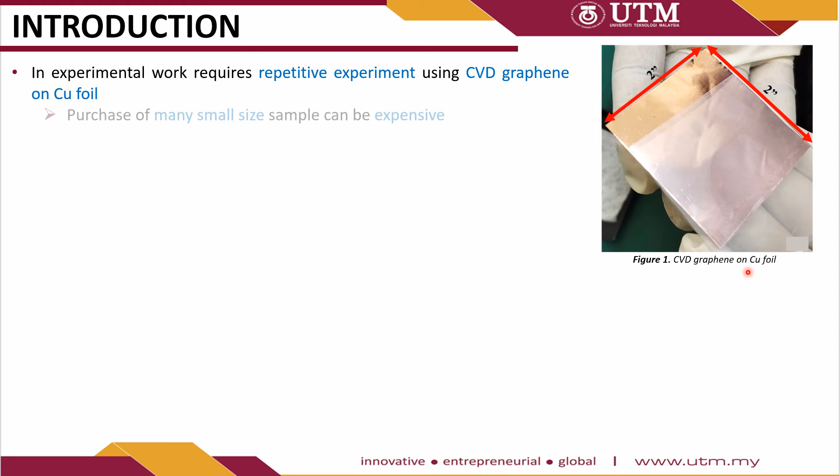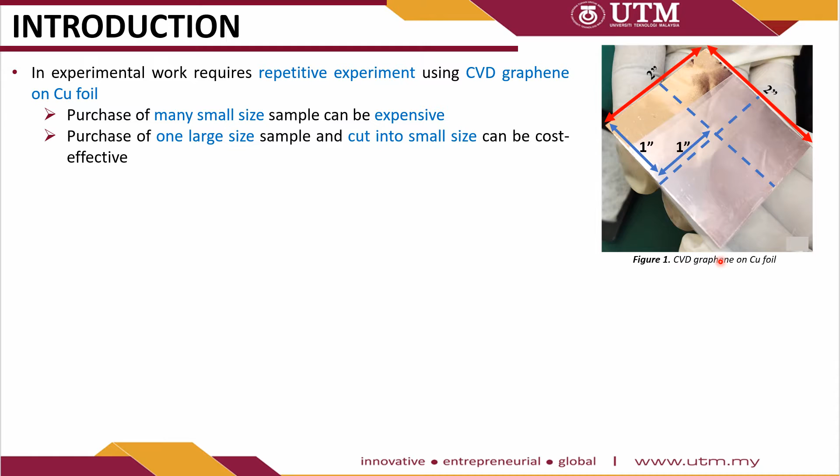Experimental work requires repetitive experiments using CVD graphene on copper foil. Purchase of many small size samples can be expensive. This can be overcome by purchasing one large size sample and cutting it into small sizes. It can be cost effective. The cost below shows a major difference in terms of the price.

One piece of 2 x 2 inch graphene costs around $215 and it can be cut into 4 small pieces with size 1 x 1 inch. When the cost was divided, one piece of cut CVD graphene on copper foil only costs $53.75. This is way cheaper compared to buying 4 pieces of 1 x 1 inch CVD graphene on copper foil separately.

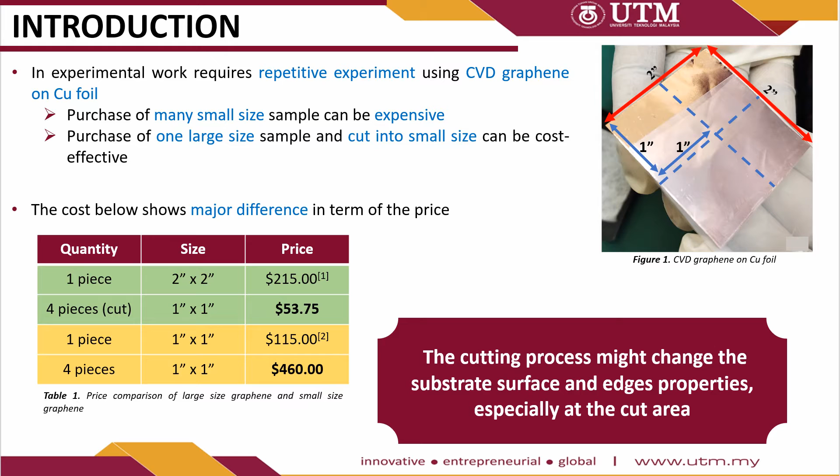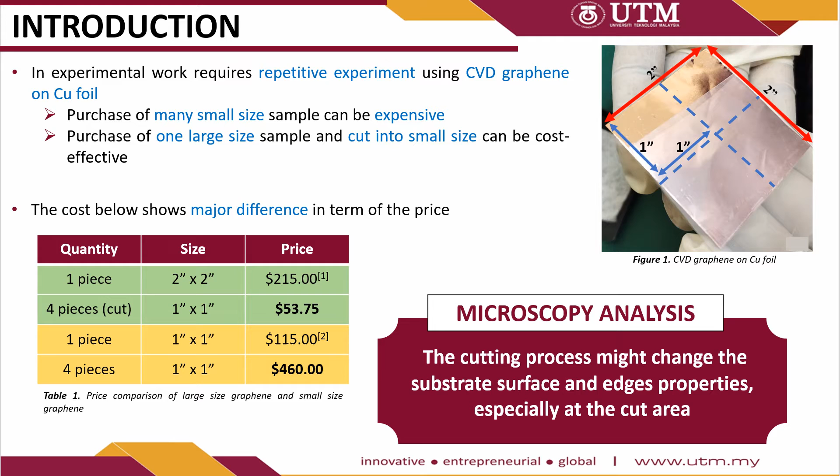However, it is important to note that the cutting process might change the substrate surface and edge properties, especially at the cut area. Therefore, microscopy analysis is important for surface evaluation on copper foil substrate grown with single-layer graphene prior to further experimental work.

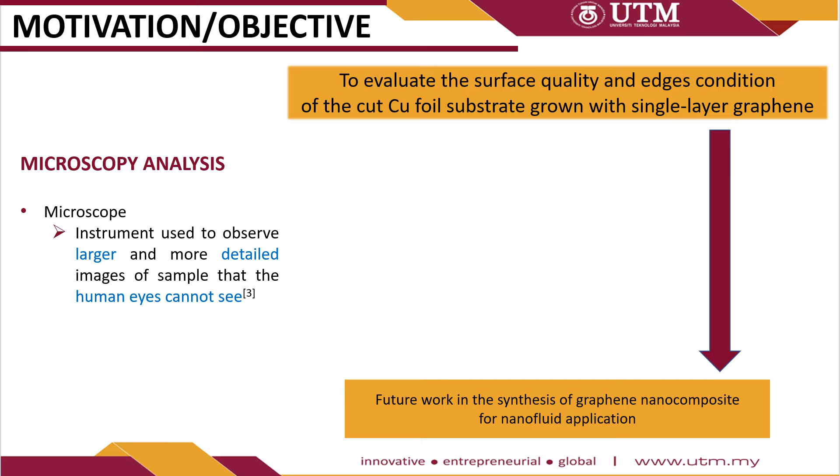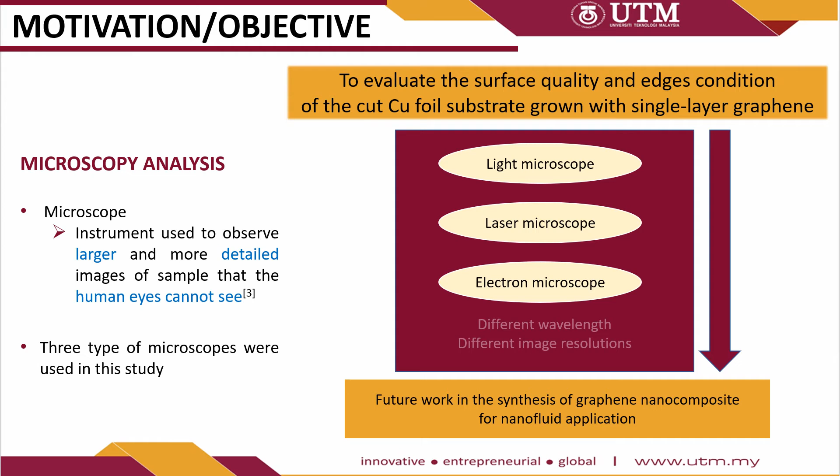A microscope is an instrument used to observe larger and more detailed images of samples that the human eyes cannot see. Microscopy analysis is important in this study to evaluate the surface quality and edge condition of the cut copper foil substrate prior to future work in the synthesis of graphene nanocomposite for nanofluid application. 3 types of microscope were used in this study, that is light microscope, laser microscope, and electron microscope. This is because each type of microscope has different wavelength and different image resolution.

For experimental work, copper foil substrate grown with single-layer graphene in original size of 2 x 2 inch was cut into small size samples by using a pair of high-quality stainless steel scissors. Fine-tip stainless steel tweezers were used as a handling tool. For microscopy analysis, observation was performed on the same cut substrate in the following order, that is, optical microscope and digital microscope, 3D laser scanning microscope, and field emission scanning electron microscope. Each type of microscope has different illumination sources.

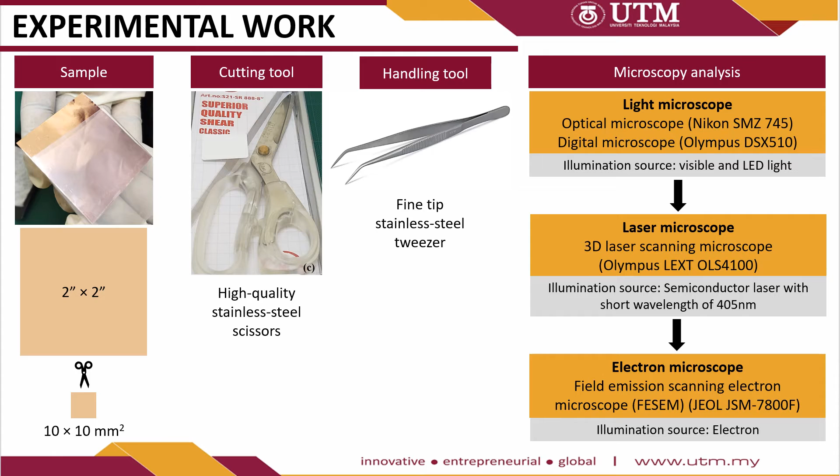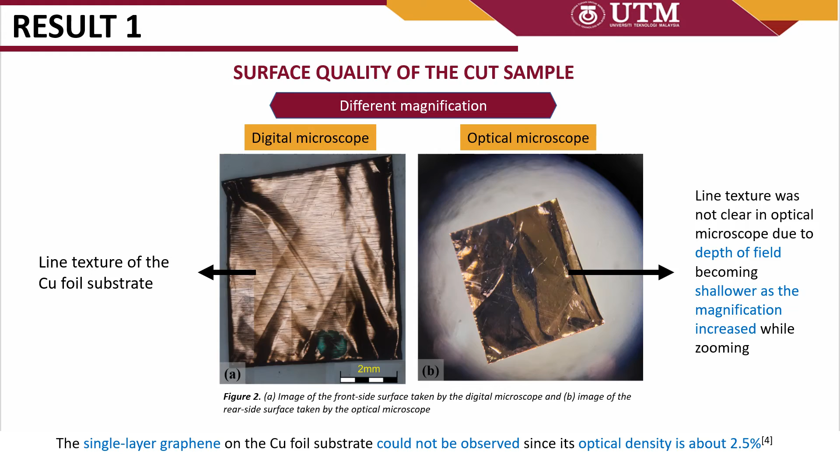Other than that, line texture was not clear in optical microscope due to depth of field becoming shallower as the magnification increased while zooming. Additionally, the single-layer graphene on copper foil substrate could not be observed since its optical density is about 2.5%. FESEM was then performed at high magnification on both sides of the copper foil substrate, which then confirmed the line texture of the copper foil substrate.

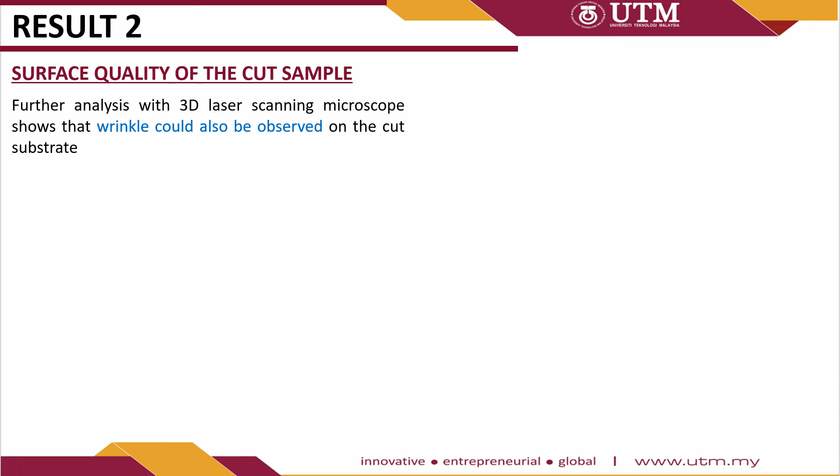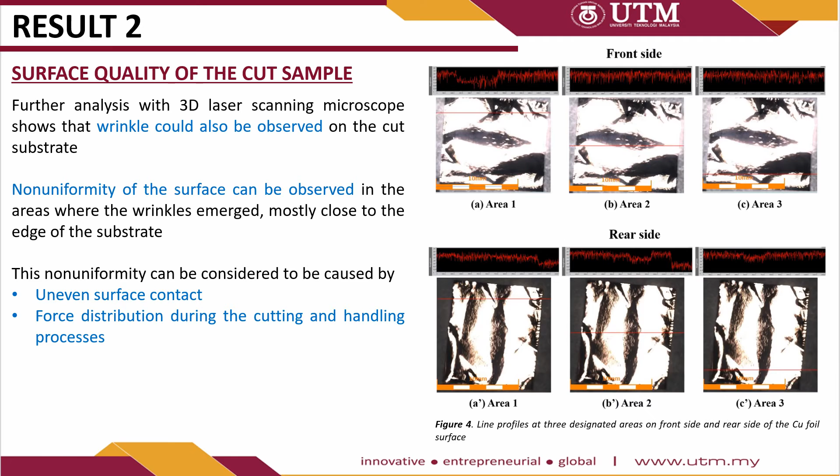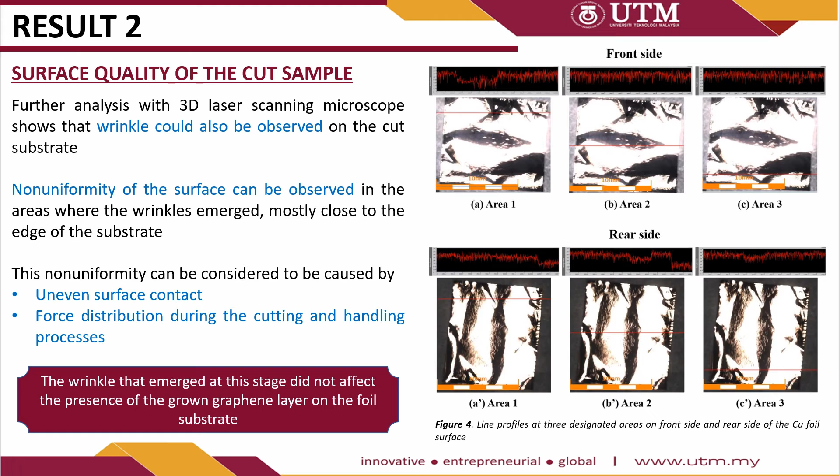Further analysis with 3D laser scanning microscope shows that wrinkles could also be observed on the cut substrate as shown in figure 4. Non-uniformity of the surface can be observed in the areas where the wrinkles emerge, mostly close to the edge of the substrate. This non-uniformity can be considered to be caused by uneven surface contact and force distribution during the cutting and handling processes by using scissors and tweezers respectively. However, the wrinkle that emerged at this stage did not affect the presence of the grown graphene layer on the foil substrate. Next result is the edge condition of the cut sample.

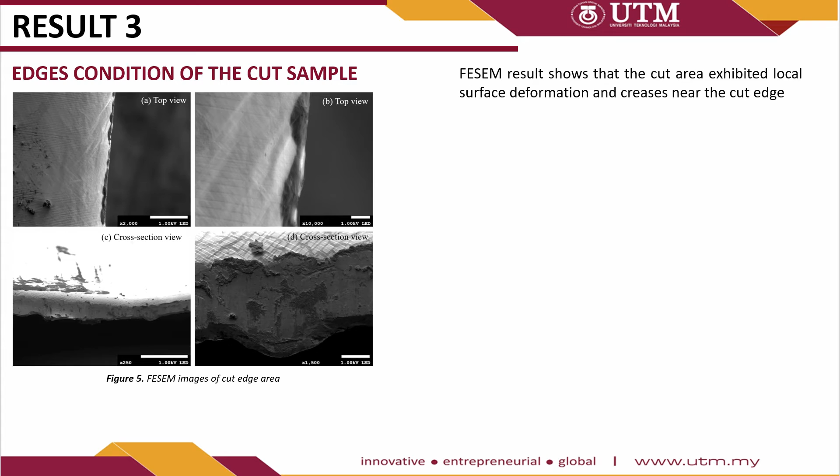Figure 5 is the FESEM images of the cut edge area. FESEM result shows that the cut area exhibited local surface deformation and creases near the cut edge, which then caused the edge roughness on the cutting surface. The cutting process involves friction between the scissors and the copper foil substrate. This friction developed edge roughness during the cutting process, attributed to the existence of cutting force.

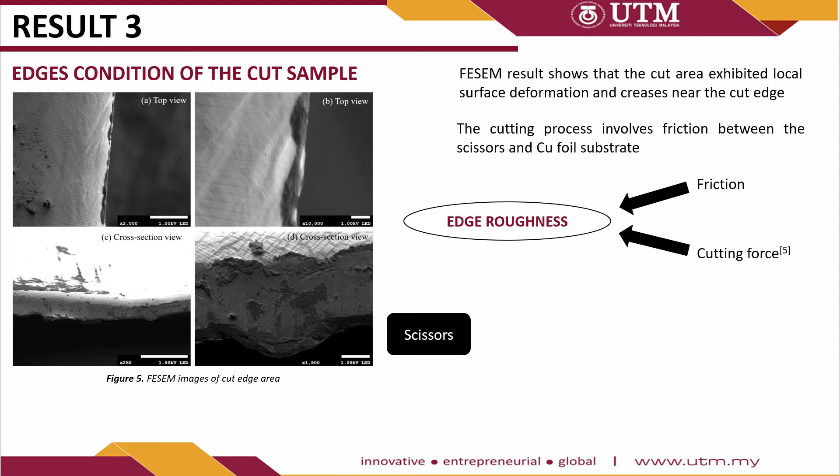Although cutting the substrate using a pair of scissors produces edge roughness, this method is still recommended compared with cutting the substrate using a diamond cutter or knife. This is because this method can prevent damage to the graphene layer as it avoids direct contact with the substrate surface. The roughness, however, can be reduced by controlling the speed and the angle of the cutting forces.

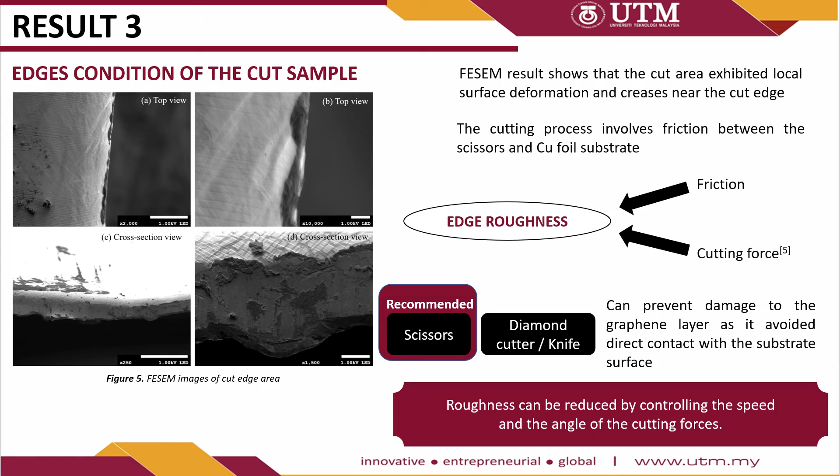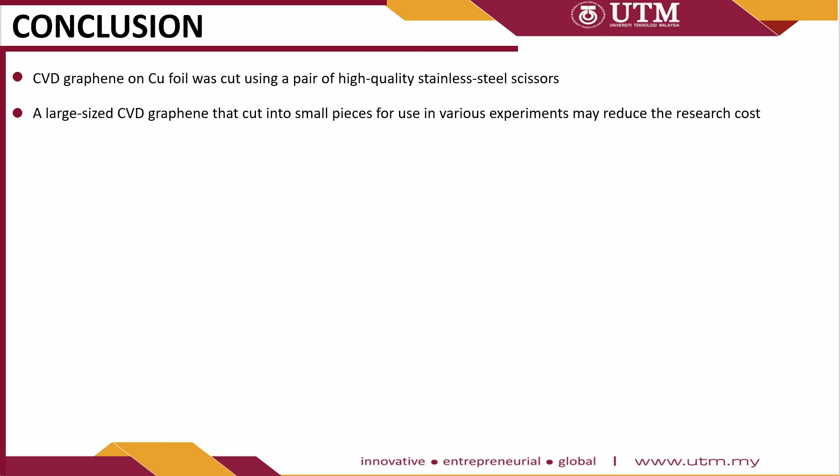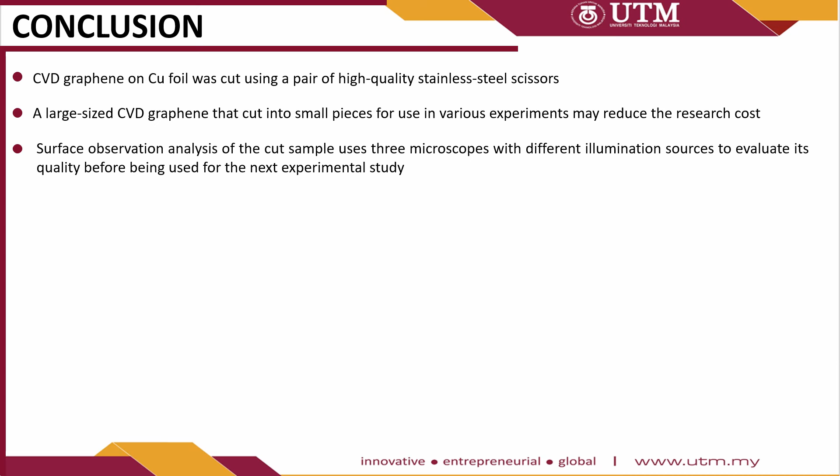As a conclusion, in this study, CVD graphene on copper foil was cut using a pair of high-quality stainless steel scissors. A large-size CVD graphene cut into small pieces for use in various experiments may reduce the research costs. Surface observation analysis of the cut sample uses 3 microscopes with different illumination sources to evaluate its quality before being used for the next experimental study.

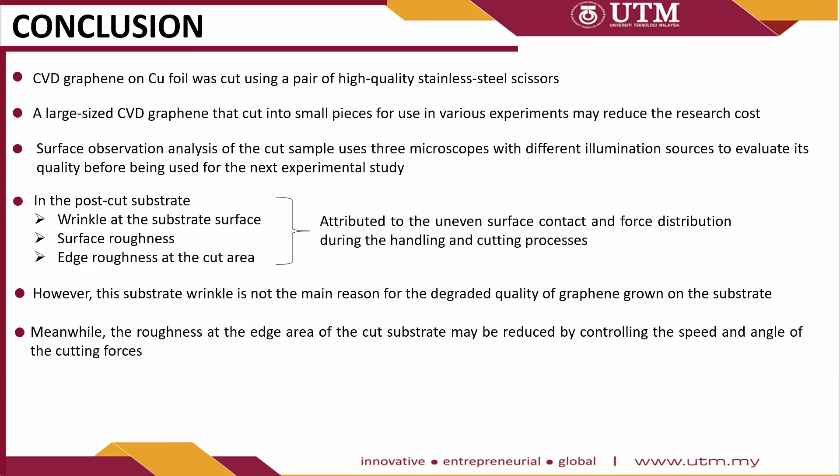In the post-cut substrate, wrinkles at the substrate surface, surface roughness, and edge roughness at the cut area were observed, which are attributed to the uneven surface contact and force distribution during the handling and cutting processes using tweezers and a pair of scissors respectively. However, this substrate wrinkle is not the main reason for degraded quality of graphene grown on the substrate. Meanwhile, the roughness at the edge area of the cut substrate may be reduced by controlling the speed and the angle of the cutting forces.

Finally, the information obtained from this preliminary study on sample preparation is important for future work in the synthesis of graphene nanocomposites for their application in nanofluids.